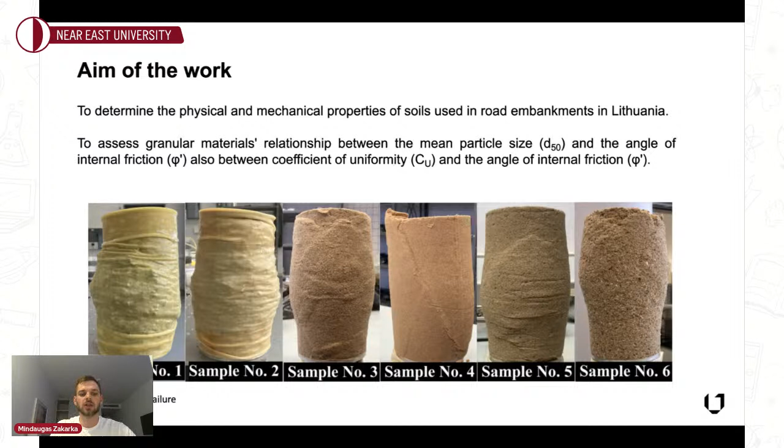You can see in the photos how a specimen looks after the triaxial tests. So why is it important?

I found that a lot of different researchers worked to determine the relationship of particle size with angle of internal friction. For example, direct shear test, triaxial test, 2D and 3D discrete element method analysis. And conclusions were obtained: at low sandy soil densities, the angle of internal friction decreases with increasing effective diameter of the particles.

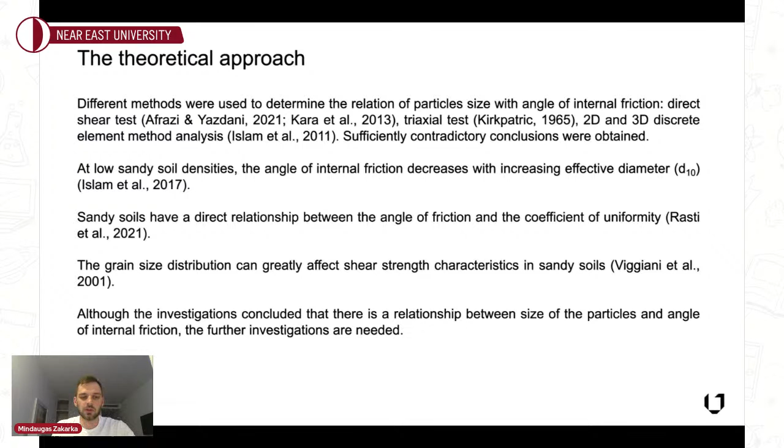Sandy soils have a direct relationship between the angle of friction and the coefficient of uniformity. The grain size distribution can greatly affect shear strength characteristics in sandy soils. And the main conclusion is that further investigations are needed.

So I had 6 different soils, 3 of them gravels and 3 of them sands, with different gradations. 2 of them are poorly graded gravels, 1 is medium graded, 2 poorly graded sand, and 1 medium graded sand.

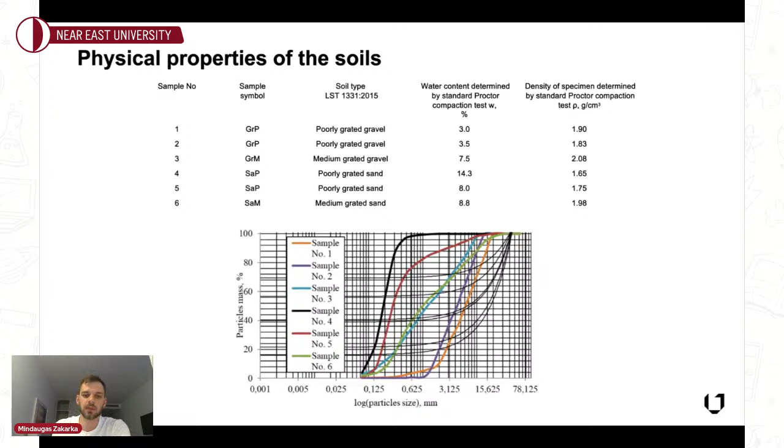I conducted proctor tests, standard proctor tests, to determine optimal water content to reach optimal density of the specimens, and I used them in the triaxial tests.

My specimens are diameter of 100 millimeters and height 200. The condition is unsaturated, meaning only optimal water content is added for preparation of the specimens and for compaction, and no more water is added.

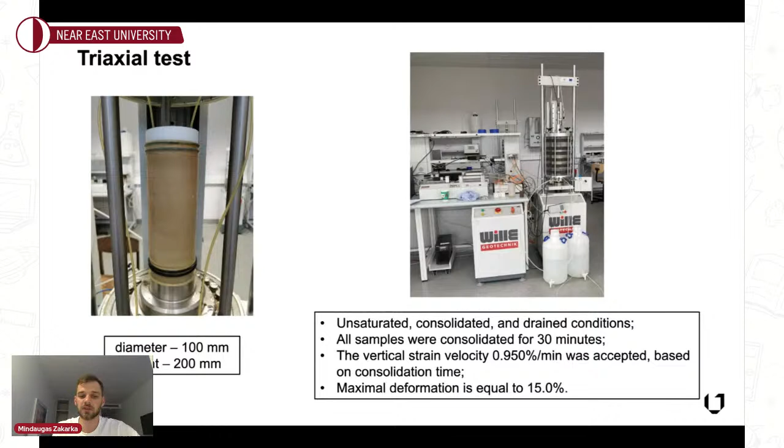All the samples were consolidated for 30 minutes, and based on that, a vertical strain velocity was accepted, which is equal to 0.95% per minute, and the maximal deformation equal to 15% was reached.

It is important to select the right cell pressures for the triaxial test. After analysis of 4 normative documents used in Lithuania and calculations, I found out that under the embankment, which is affected by traffic load, it is normal to expect cell pressures of 20, 50, and 70 kilopascals. So 6 different soils and 3 different cell pressures.

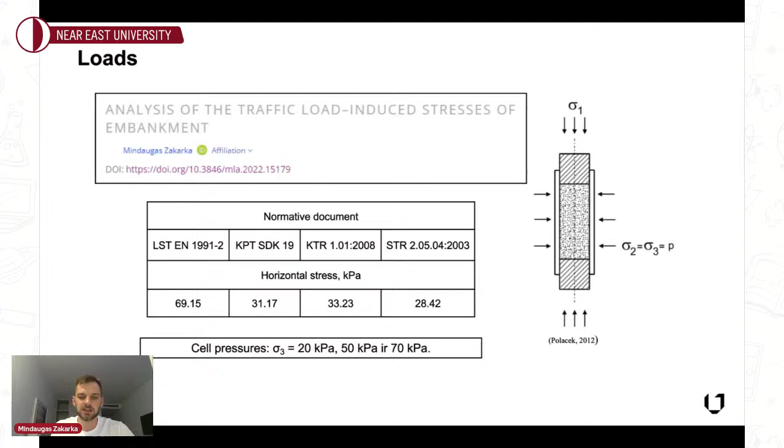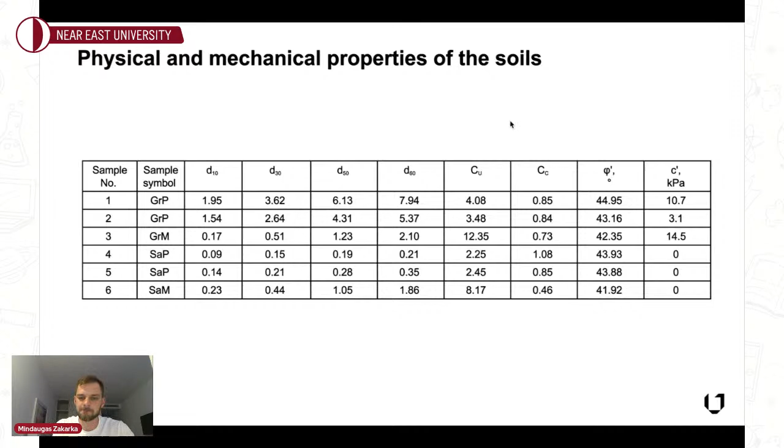After the triaxial test and other tests, I found out uniformity coefficients and the angle of internal friction, which is most important for me. And I found out a few relationships. The first is the relationship between average size of particles in gravel soil and the angle of internal friction.

When the average particle size increases, the angle of internal friction increases too. But I didn't find the relationship between coefficient of uniformity and angle of internal friction for gravel soils, and the opposite for sandy soils: when the coefficient of uniformity increases, the angle of internal friction decreases, and there was no relationship between the average particle size of sand and the angle of internal friction.

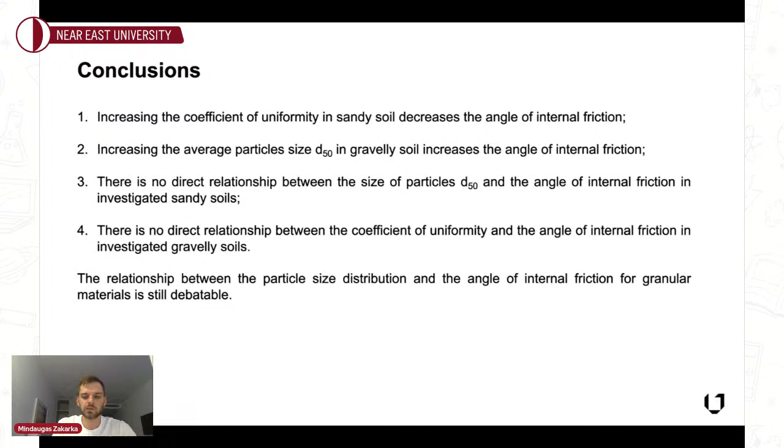So increasing the coefficient of uniformity in sandy soils decreases the angle of internal friction, but it doesn't work for gravel soils. For gravel soils, increasing the average particle size increases the angle of internal friction. The main conclusion is that there is a relationship between particle size distribution and the angle of internal friction, but the results are still debatable.

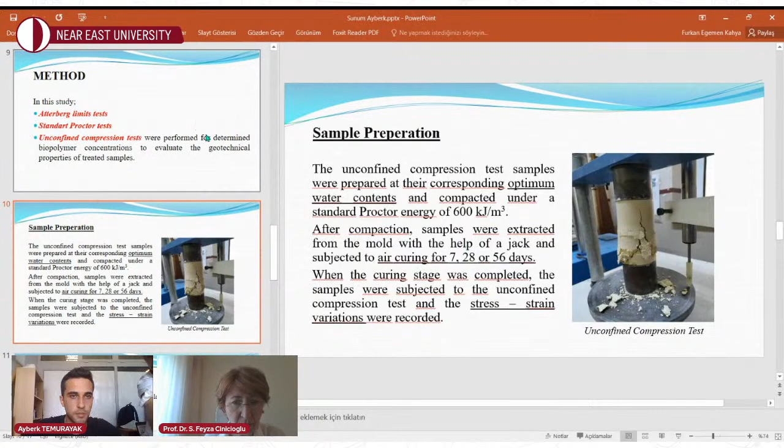If possible, could you go through from the beginning? Okay, in a fast way, quickly please. From the beginning. Yes, yes, please.

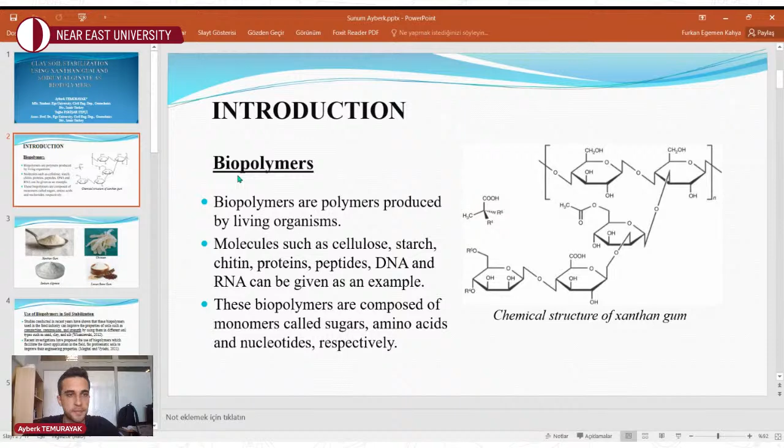Apart from these biopolymers, which are widely found in nature, there are also products that are used in the food industry, especially in terms of thickeners. Some of these biopolymers are xanthan gum, guar gum, sodium alginate, locust bean gum, and chitosan, etc.

Studies conducted in recent years have shown that these biopolymers used in the food industry can improve the properties of soils such as compaction, compression, and strength by using them in different soil types such as sand, clay, and silt. Recent investigations have proposed the use of biopolymers which facilitate direct application in the field for problematic soils to improve their engineering properties.

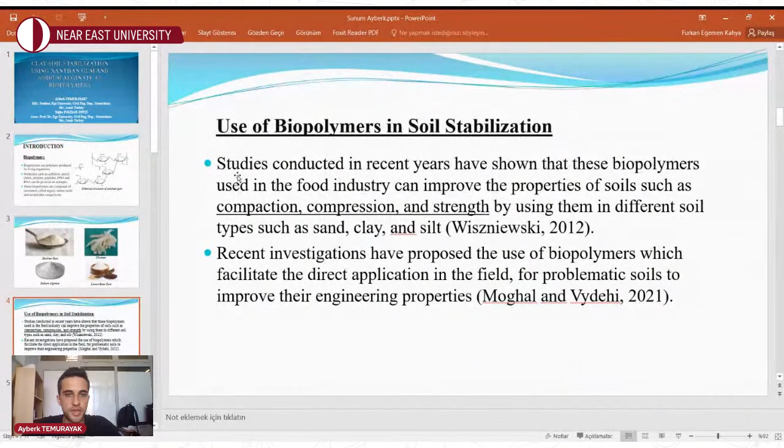In this study, two types of biopolymers, xanthan gum and sodium alginate, were used. Xanthan gum is a polysaccharide obtained from the fermentation of glucose or sucrose with Xanthomonas campestris bacteria. It is used as a stabilizer and thickener additive in the food industry. It has high thickening properties even in low amounts, like 0.5% and 1%.

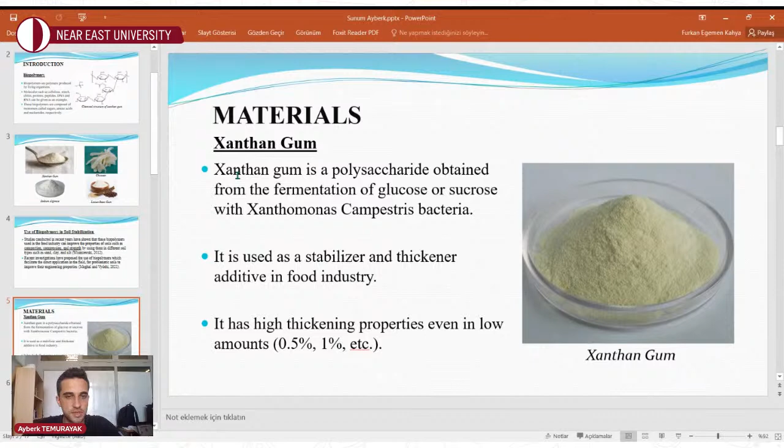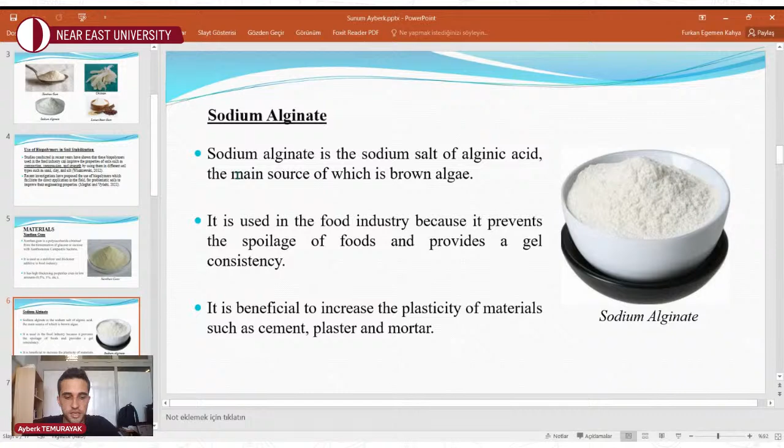Sodium alginate is the sodium salt of alginic acid, the main source of which is brown algae. It is used in the food industry because it prevents the spoilage of foods and provides a gel consistency. It is beneficial to increase the plasticity of materials such as cement, plaster, and mortar. Due to these features, the variety of studies on soil stabilization using different biopolymers has increased recently.

Since the beneficial effect of biopolymers is evident in fine-grained soils in the literature, kaolin clay was used in this study. The wet mixing method was used in the preparation of samples in all tests. According to this method, biopolymers were prepared as a solution in water and mixed with soil by weight of water.

Biopolymers used in soil stabilization were generally mixed with soil at rates ranging from 0.25% to 4%, as they have a high consistency increase feature even at low concentrations. The ratios that give the best results may vary depending on the parameters investigated.

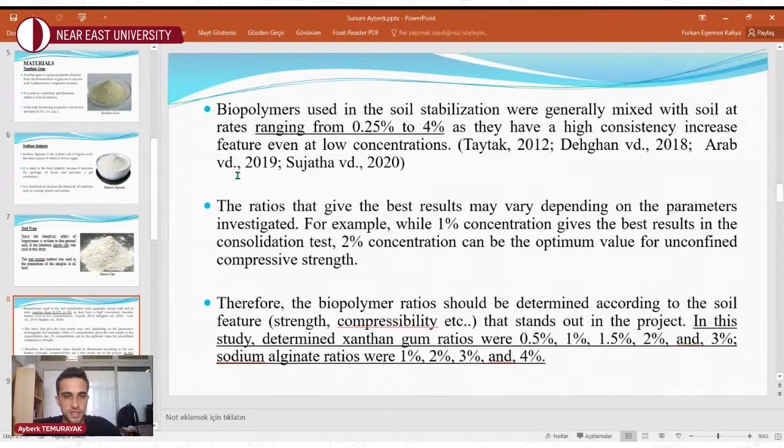For example, while 1% concentration gives the best results in the consolidation test, 2% concentration can be the optimum value for unconfined compressive strength. Therefore, the biopolymer ratios should be determined according to the soil feature that stands out in the project. In this study, determined xanthan gum ratios were from 0.5% to 3%, and sodium alginate ratios were from 1% to 4%.

In this study, Atterberg limits tests, standard Proctor tests, and unconfined compression tests were performed for determined biopolymer concentrations to evaluate the geotechnical properties of treated samples.

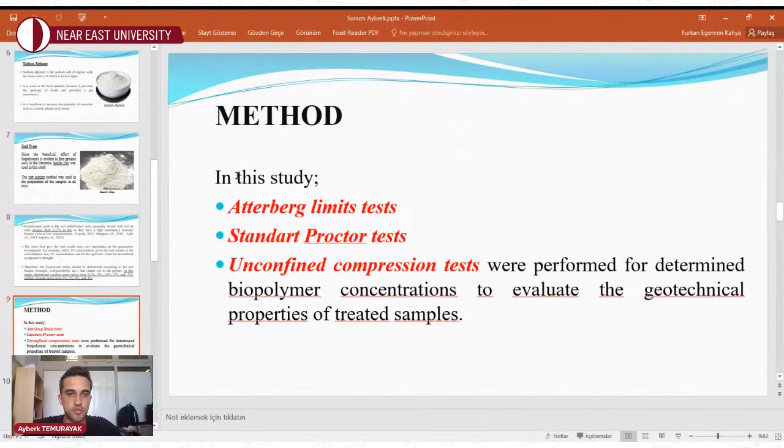Compaction tests were carried out to determine the optimum water content and maximum dry unit weight of clay and biopolymer treated clay. The unconfined compression test samples were prepared at their corresponding optimum water contents and compacted under a standard Proctor energy, which is 600 kJ per cubic meter.

After compaction, samples were extracted from the mold with the help of a jack and subjected to air curing for 7, 28, and 56 days. When the curing stage was completed, the samples were subjected to the unconfined compression test and the stress-strain variations were recorded.

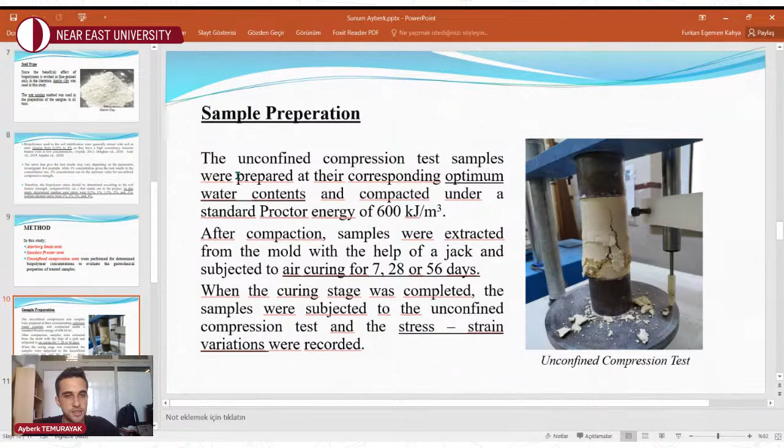The liquid and plastic limits of the kaolin clay were determined according to ASTM standard. The liquid limit of the clay was 51.3 and plastic limit was 36.5, and the plasticity index was 14.8. The optimum water content of the clay was 31% and the maximum dry unit weight was 1.64 tons per cubic meter.

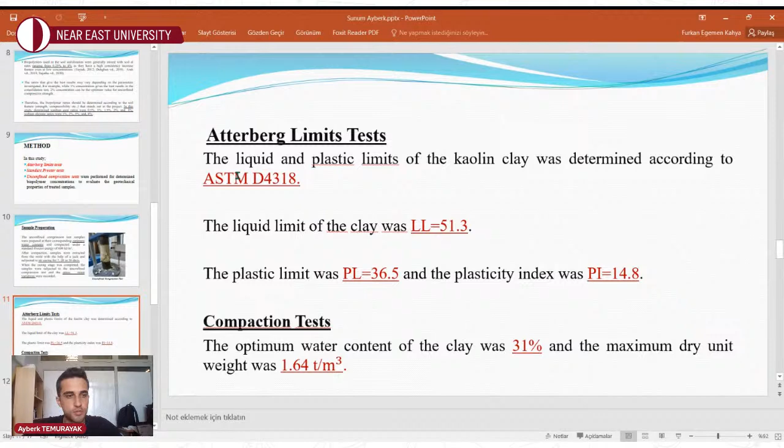Considering the results of the liquid limit tests, a significant increase was observed in treated samples. While the liquid limit increased by 34% with the addition of xanthan gum, from 51.3 to 68.7, there was an increase of over 100% from 51.3 to 133 with the addition of sodium alginate. At the highest concentration of sodium alginate, the rapid change in viscosity leads to a nonlinear increase in the liquid limit.

Plastic limit increased with the addition of biopolymers, but compared to the liquid limit, the increase of the plastic limit was very low, only 1%. Since the liquid limit increased more than the plastic limit, the plasticity index was also increased. Adding water to the biopolymer-treated soils activated the monomers of the biopolymer and formed ionic and covalent bonds with soil particles. Thus, monomers required more water, which increased the liquid limit and plasticity index of the soil.

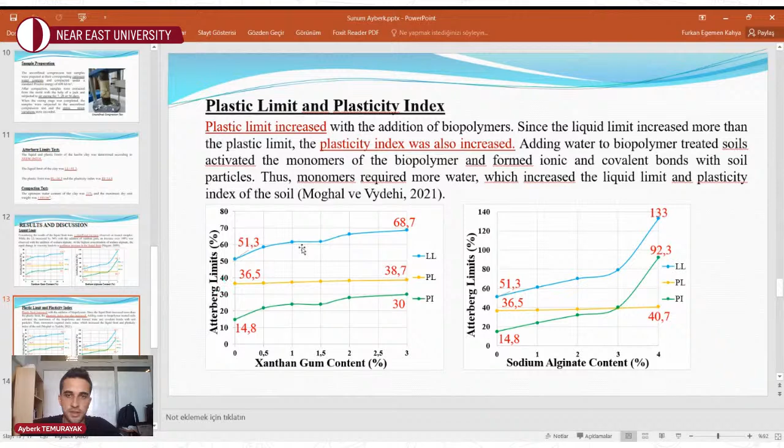In this figure, the blue curve represents the xanthan treated sample, and the green curve is the sodium alginate treated sample.

As a result of the compaction test, the optimum water content of kaolin clay was 31% and the maximum dry unit weight was 1.64 tons per cubic meter. With the addition of 2% xanthan gum and 3% sodium alginate, the optimum water content increased by 3% and reached 34% with both biopolymers.

The maximum dry unit weight decreased slightly, reaching 1.6 tons per cubic meter in the xanthan treated sample, and also decreased slightly to 1.56 tons per cubic meter in the sodium alginate treated sample. The decrease in maximum dry unit weight and the increase in optimum water content was due to the fact that the monomers located in the pores between soil particles absorb more water and cause a net decrease in particle interaction.

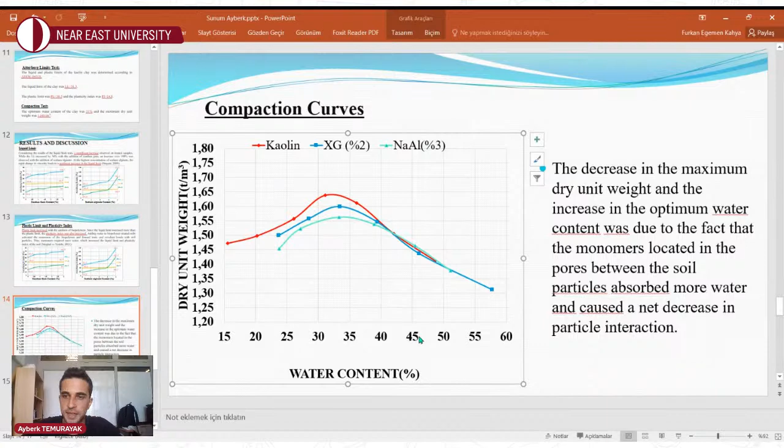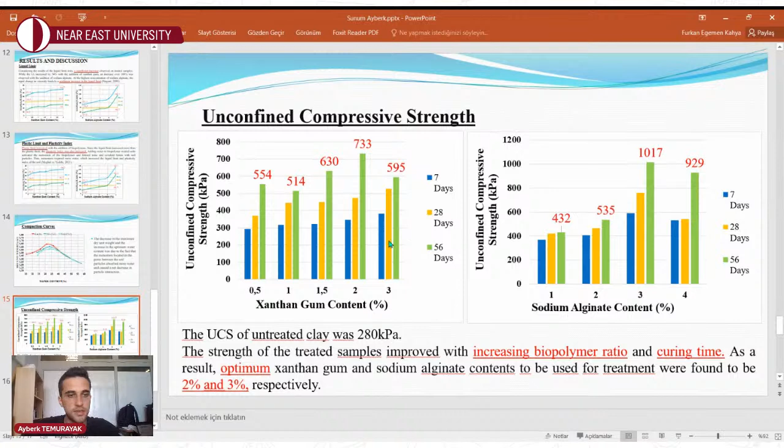The unconfined compressive strength of untreated clay was 280 kPa. The strength of the treated samples improved with increasing biopolymer ratio and curing time. The increase of unconfined compressive strength was 2.6 times in 56-day cured samples treated with 2% xanthan gum, which is 733 kPa, and 3.6 times in 56-day cured samples treated with 3% sodium alginate, which is 1017 kPa. As a result, the optimum xanthan gum and sodium alginate contents for treatment were found to be 2% and 3% respectively.

In this study, two types of biopolymers were used as an alternative soil stabilizer. Atterberg limits, compaction, and unconfined compression tests were performed with the determined concentrations of xanthan gum and sodium alginate. The liquid limit increased in all treated samples, and was higher in sodium alginate treated samples compared to xanthan gum treated samples. Plastic limits increased in both xanthan gum and sodium alginate treated samples, and plasticity index also increased in both treated sample groups.

The optimum water content increased by 3%, and the maximum dry unit weight of the treated samples decreased, with the lowest MDD achieved in sodium alginate treated samples. The UCS of the treated samples improved at optimum biopolymer ratios and with curing time. As a conclusion, soil stabilization with biopolymer additives is a promising approach in geotechnical applications.

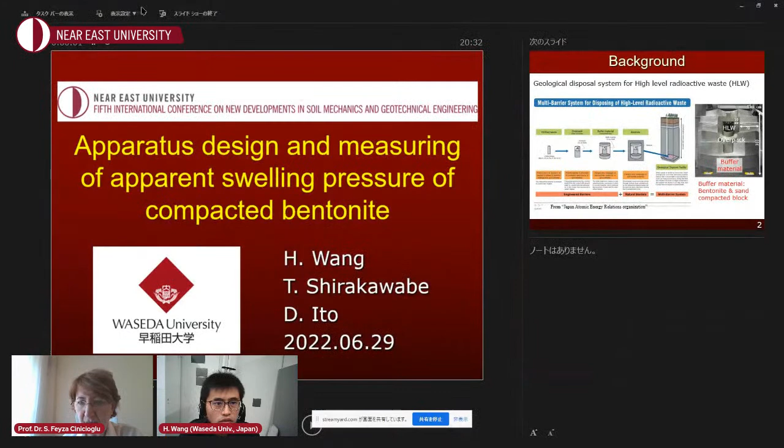Is it possible to see the screen? Hello, yes it is, can you see the screen? Is that okay? Yes, it seems okay. Okay, great, thank you. Let me start my presentation.

I'm Hailong Wang from Waseda University here in Japan. Right now it's evening. I would like to talk about the apparatus design in order to measure the so-called apparent swelling pressure of compacted bentonite.

I think this study is not so familiar to the audience, so I would like to introduce the background.

One of our studies focuses on geological disposal in order to deal with the high-level radioactive waste from the energy system. The idea of this system is to put the radioactive waste deep in the ground, several hundred meters down, and the waste itself is protected or isolated by several barriers, like the steel container, outside of that the so-called buffer material, and outside this buffer material is bedrock.

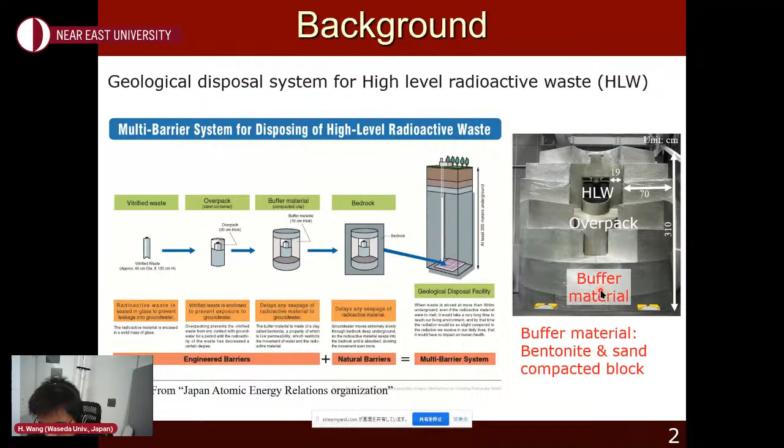Bentonite was used as the main material for this buffer material, shown here. It's in a compacted condition like this, and after absorbing water from underground, the volume of the bentonite will swell like this.

In the disposal condition, the swelling deformation is confined by the bedrock. So instead of swelling deformation, some pressure is generated in the underground condition. I call this pressure the apparent swelling pressure. This is the pressure we are trying to measure in this study.

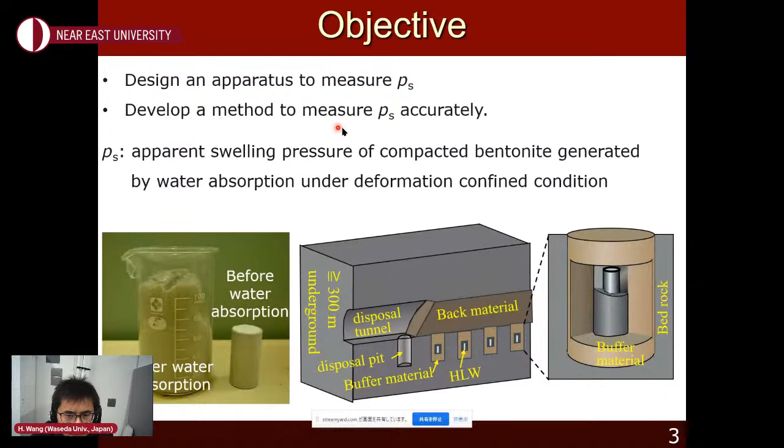The objective of this study is to design an apparatus to measure this apparent swelling pressure, PS, and to develop a method to measure it accurately.

To measure swelling pressure, in the past there have been many studies, basically using the consolidation apparatus. There are several ways. One way is first to saturate the specimen without any confining condition to allow free swelling. Then after saturation, we apply load in the consolidation apparatus, step by step, until the volume returns to the original volume. We define this pressure as the apparent swelling pressure. This is the first way.

Another way is to prepare different specimens, and for each specimen apply a different initial load - for example, zero, or some load. Under the initial load we saturate the specimen, and since under higher load the deformation will be smaller, we can find the point corresponding to zero deformation. We define this point as the swelling pressure. This is the second way.

A third way is to try to keep the volume as constant as possible. When we find some deformation, we immediately apply load to return the deformation. During saturation, if swelling happens again, we apply another load. Gradually, as the load increases, there will be a point where no more load is needed after saturation. At this point, we define another pressure as the swelling pressure. This is the third way.

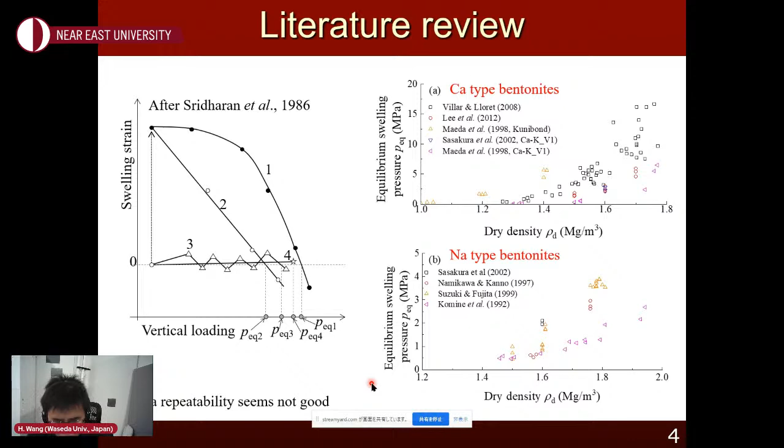For example, this is the so-called final equilibrium swelling pressure plotted against dry density. You can see that even under the same dry density, the data is scattering very much. This is for so-called calcium-type bentonite, and for sodium bentonite also, even with the same experimenter, the data is very scattered. So we considered how to get a good testing method in order to measure this pressure accurately.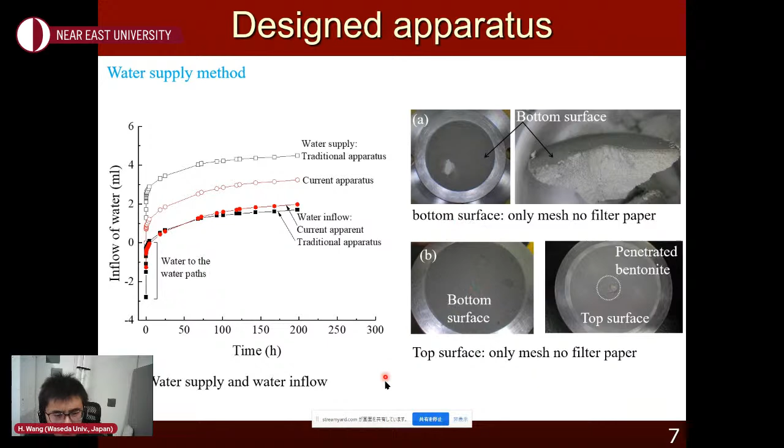Of course, we conduct some other tests to confirm this method. Basically, it's quite reliable to transport the water. However, because we used filter paper which is also compressible, it has some deformation. If possible, we try to remove the filter paper, but if we remove it, it's not easy to transport the water into the specimen. So basically, we use the mesh plus filter paper system to conduct the test.

There are some problems when we conduct the test. For example, because of the filter paper compression problem, sometimes we found that due to swelling, some material, some bentonite, squeezed out, like here. For this problem, we try to refine the apparatus to increase the manufacturing accuracy to remove this kind of problem.

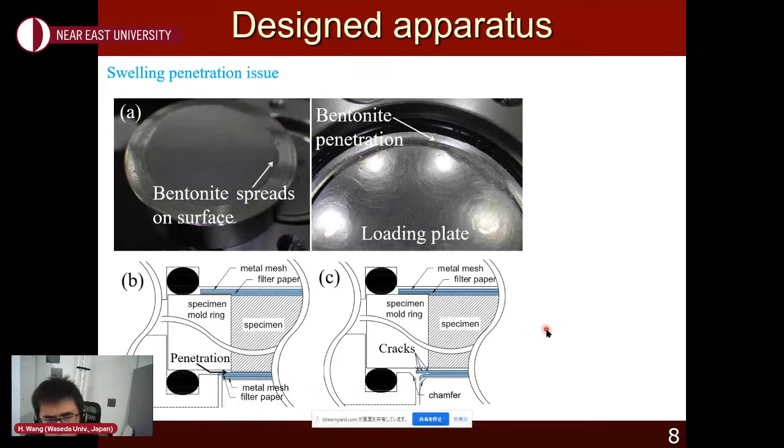Another thing is the filter paper softening. It's different from the filter paper compression. When we apply a filter paper under the specimen, the stiffness of the filter paper will reduce because of the water. Once the filter paper absorbs the water, it becomes soft. So if we apply an initial load here, because of the deformation and softening of the filter paper, there will be a reduction of the stress. So this is another problem.

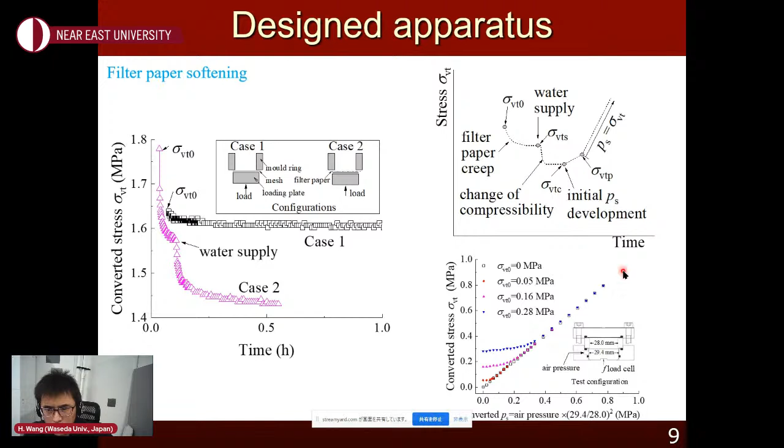In order to distinguish between the load applied initially and the swelling pressure we measured, we try to understand this by applying some calibration tests. In the test, we apply some air pressure to simulate the swelling pressure and apply the load. As a result, we can find that if we apply a relatively small initial load, basically when the pressure measured exceeds the initial pressure, the result will be the swelling pressure for the tested specimen.

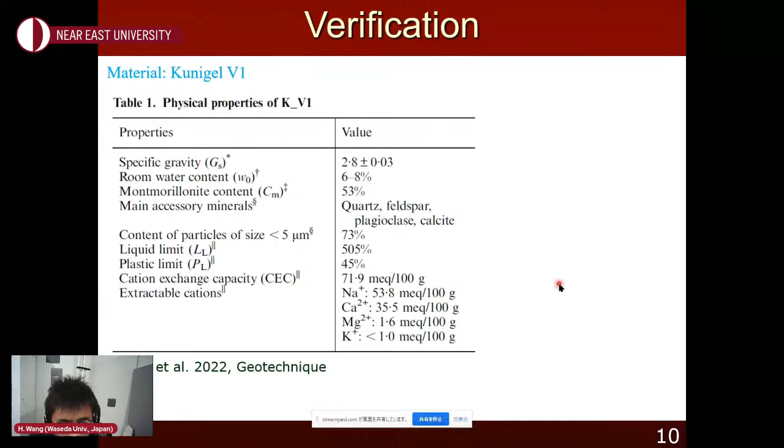So to verify the apparatus, we used a bentonite, so-called Kunigel V1. Here is the basic physical conditions of this soil. We prepared some identical tests. The first one, quite two very similar specimens. We apply the same initial load, and during the water absorption, we measure the change of the load, or the change of the swelling pressure.

This is a very typical swelling pressure curve. It increases first, then goes down, then goes up until the equilibrium swelling pressure. This is very typical. However, when we try to change the initially applied load, it can be seen the measured swelling pressure also changes somehow. The larger the initial pressure we applied, the larger the final swelling pressure we measured would be.

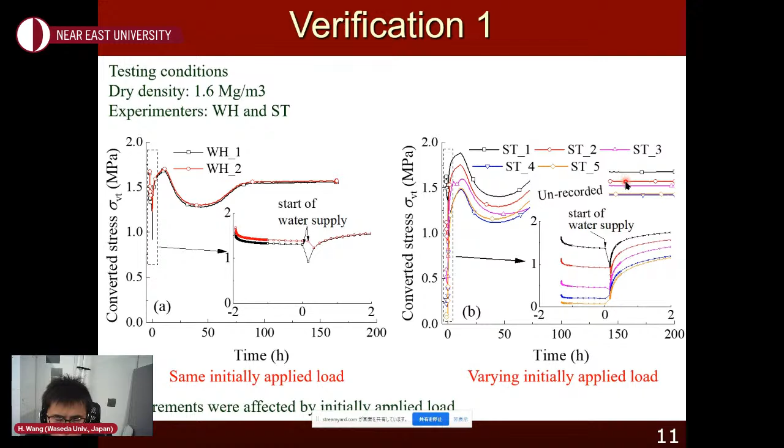So here's a problem. It's induced mainly because of somehow the initial pressure applied to the specimen. It's a little bit complicated to explain here, but we found a way to solve it. When we prepare a specimen, after compaction, we try to trim the surface of the specimen because of the deformation of the filter paper, there's some specimen outside of the range. So we trim this way and turn the specimen so that before the test, there's a small space under the load cell.

By this way, we again prepared several identical specimens and applied different vertical loading. As you can see, although there's still some very tiny difference, basically compared to the previous study, the results are quite similar. This is conducted by the same experimenter.

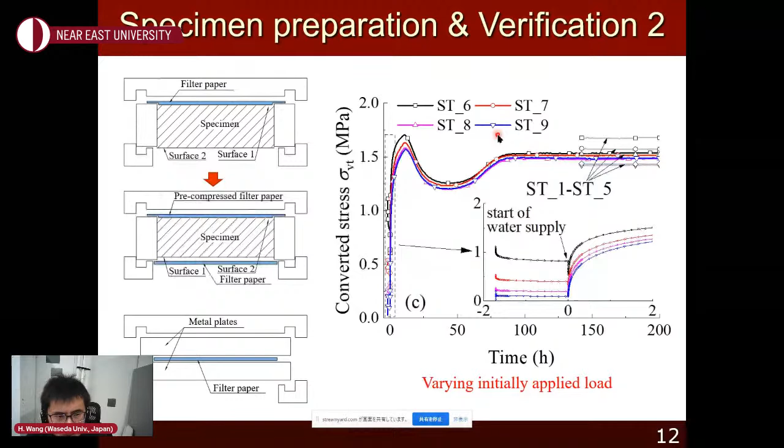In order to see any difference based on the experimenters, we conduct 3 tests by one experimenter and another 3 tests by another one. As you can see, for the same dry density, the measured curve is very similar, although there's some difference, but basically they're quite similar. And for different dry density, you can see the measurement is also quite well. As increase of the dry density, the pressure increases.

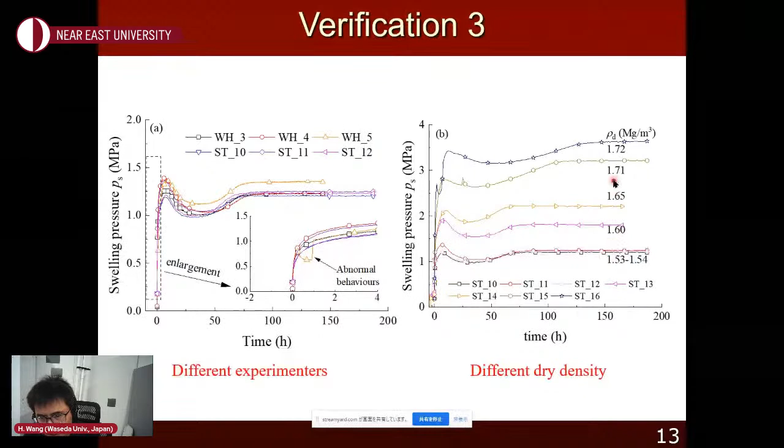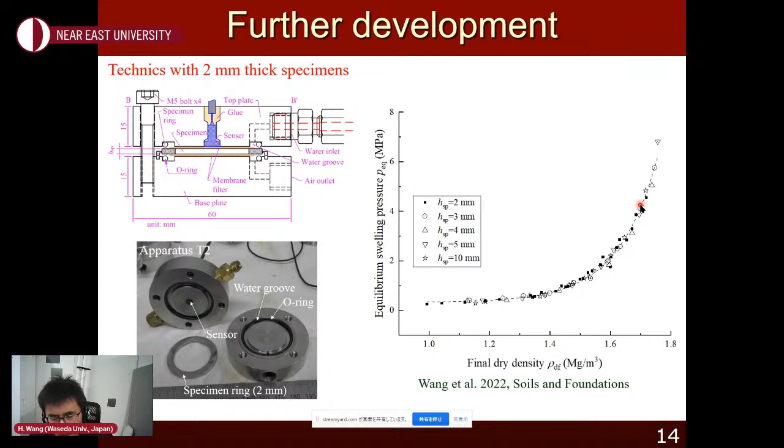As a conclusion, we proposed an apparatus and test procedure to measure the apparent swelling pressure, and the reliability, I think, is very high with the proposed procedure. The design drawing and the specimen preparation method are open right now, so if you're interested, you can check. Thank you very much, this is all from me.

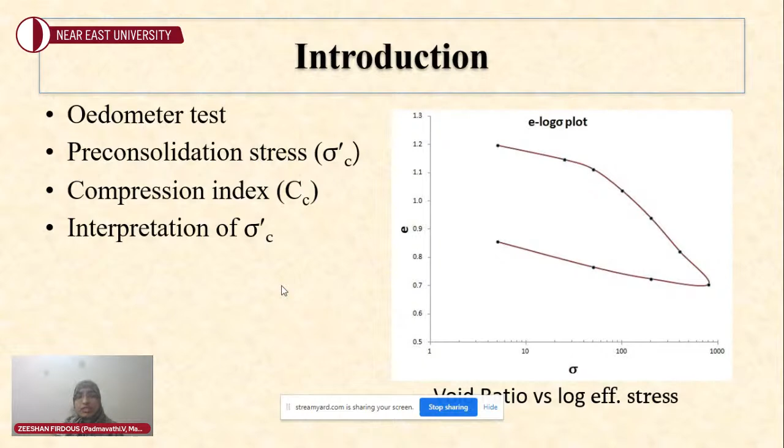Introduction: Oedometer test is usually used to represent the one-dimensional soil deformation behavior plotted on a semi-logarithmic graph with void ratio versus effective stress. The pre-consolidation stress is an important parameter which plays a vital role in estimation of settlements, and compression index also plays a greater role in estimation of settlements. Hence this study involves interpretation of pre-consolidation stress from different methods, and the analysis goes on.

The methods used for interpretation of pre-consolidation stress are Casagrande method, Silva, Schmertmann, Nagaraj et al. These are semi-logarithmic methods. Butterfield, Oikawa, Sridharan - these are bilogarithmic methods. Janbu's method utilizes the concept of constraint modulus, in which soil deformation behavior is studied in only one direction.

The most commonly used method is Casagrande method. This method utilizes the concept of maximum point of curvature. At this point, the tangential line and a horizontal are drawn, and the backward extension of the virgin compression line intersects the line of bisection at point T. The stress corresponding to point T is the pre-consolidation stress.

Similarly, in Silva's method, the backward extension of the virgin compression curve intersects the initial void ratio line at point C, and the drop of a vertical from point C intersects the curve at point E. The extension of point E to point F intersects the virgin compression line. The stress corresponding to point F is the pre-consolidation stress from Silva's method.

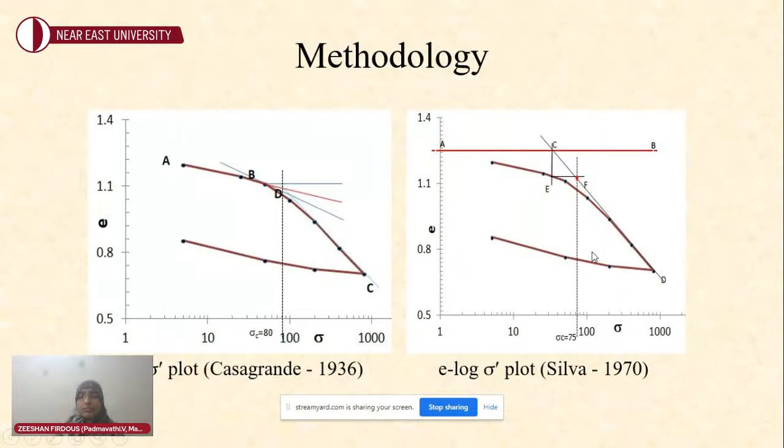In the Nagaraj method, the pre-consolidation stress is estimated from the intersection of the normal drawn from the point of maximum curvature, which intersects the initial void ratio line at point D. The stress corresponding to this point D is the pre-consolidation stress.

The Schmertmann method is generally utilized in obtaining field compression curve. The backward extension of virgin compression curve from point 0.42 e naught to the initial void ratio line intersects at point G. A line EF is drawn parallel to the recompression curve, and the stress corresponding to point F gives the pre-consolidation stress.

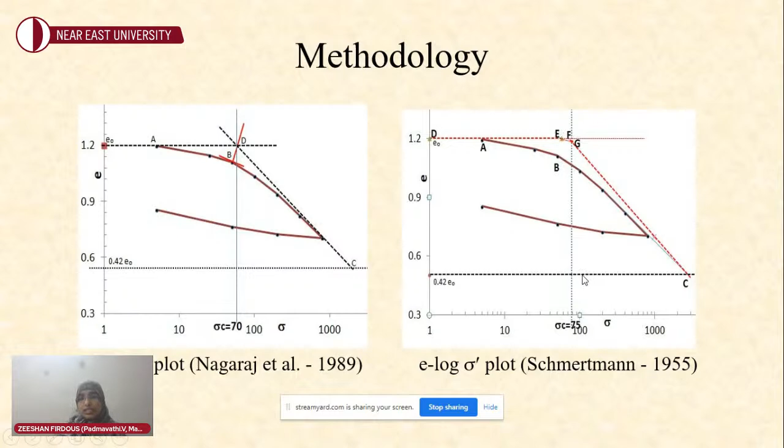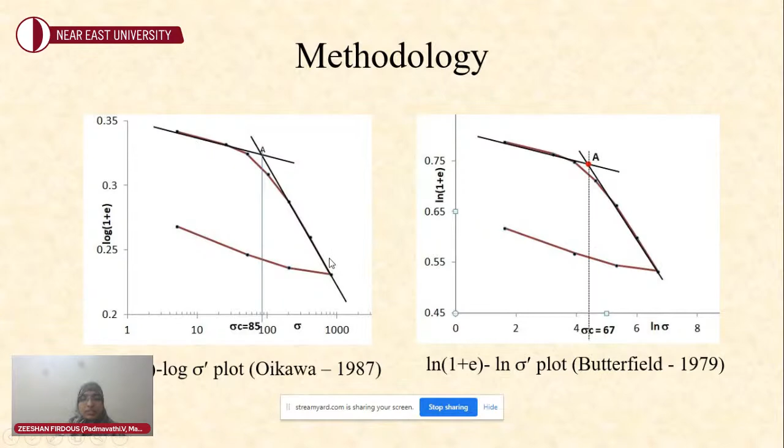Oikawa and Butterfield methods are both bilogarithmic methods. The linear portions of the curves are intersected at points A, and the stress corresponding to these points gives the pre-consolidation stress.

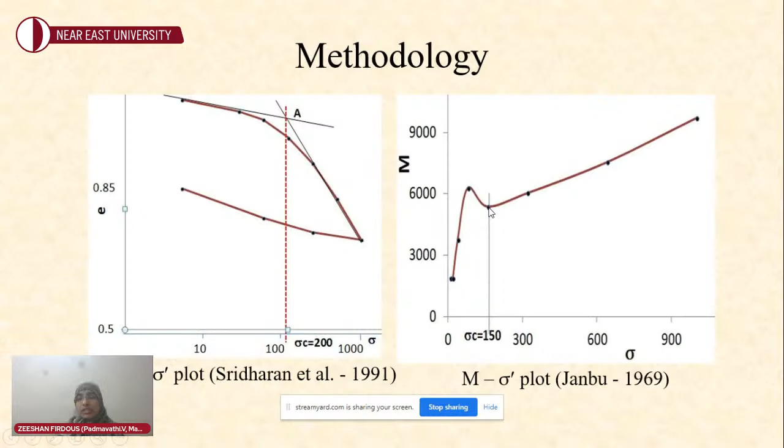Sridharan method is also a bilogarithmic method in which void ratio and effective stresses are plotted on logarithmic scales. The intersection of the linear portions of the curves gives sigma c. Janbu's method utilizes the constraint modulus; when a significant drop in constraint modulus is observed, the stress corresponding to the point of drop gives the pre-consolidation stress.

The compression index is calculated from equations 1, 2, and 3. Equation 1 is a general equation which is the slope of the E log sigma plot, giving Cc. The compression index from the Butterfield and Oikawa method is

derived as Cc equals Cc dash minus 0.0192, divided by 0.19, where Cc dash is the slope of the virgin compression curves from these methods. For the Sridharan method, the equation is derived as Cc equals Cc double dash minus 0.1067, divided by 0.23, where Cc double dash is the slope of the log E versus log sigma plot.

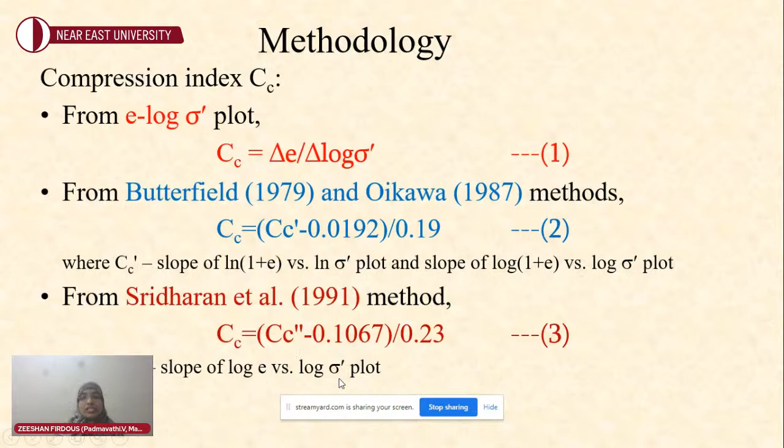In this study, the data is collected from sources already available in the literature. The site locations are from Egypt, California, and Kerala.

From this entire study, we can infer that the Casagrande method alone is not desirable to give the sigma c values in estimation of settlements. The results obtained from various methods can be analyzed, and the most repetitive results can be chosen to get appropriate settlement estimations.

The conclusions of this study are that the variations are higher at higher sigma c and higher overconsolidation ratios, as the sample has to undergo a large range of unloading and loading cycles, and due to this there might be a variation in the estimated values.

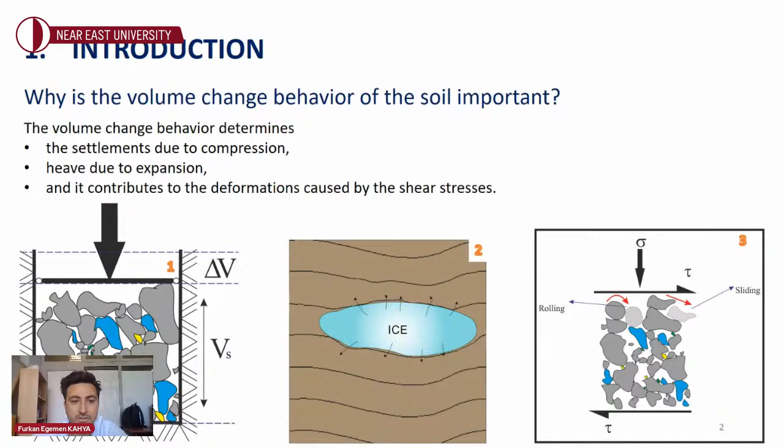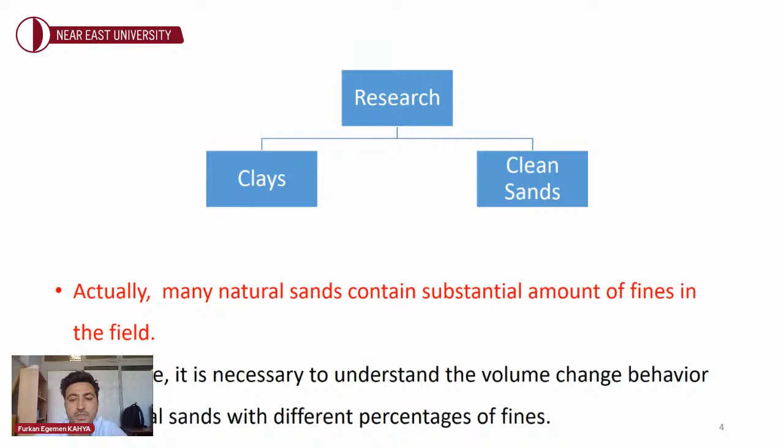When we look over the literature, clays and clean sands have been studied extensively in terms of volume change behavior. Thereby, it becomes important to understand the volume change behavior of natural sands with different percentages of fines.

In this study, two different natural sands named Nazarköy and Yamanlar sands, and fine natural mica, were used to evaluate the volume change behavior and its effect on the shear strength of the soil.

The Nazarköy sample was taken from the Kemalpaşa district. On the other hand, Yamanlar sand was taken from near the Çiğli district. Also, natural mica particles were provided from a private company.

According to ASTM standards, Nazarköy and Yamanlar samples are both classified as poorly graded sands. Also, maximum void ratio, minimum void ratio, and specific gravities are given in the table.

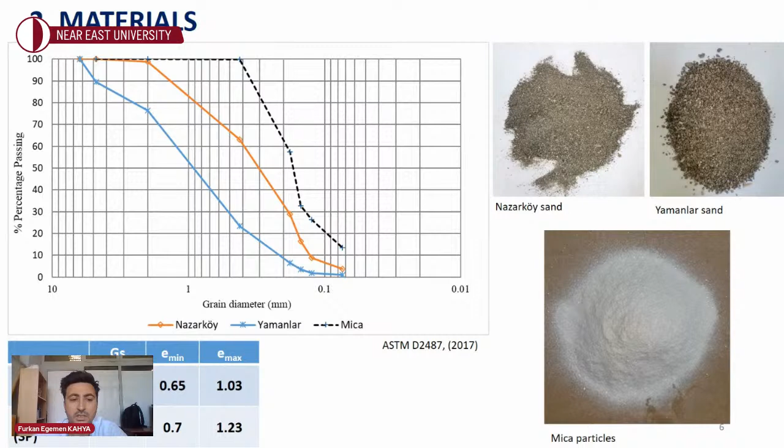Within the context of this study, oedometer tests and triaxial tests were conducted. The grain sizes of both sands were limited between number 10 to number 40 sieves.

For the oedometer test, natural state and 7 different sand-mica mixtures were prepared under fully saturated state, and the sands were placed in the mold layer by layer with a smooth tamping technique. Incremental loading was applied in 9 stages, from 12.5 kilopascal to 3.2 megapascal, and each loading stage was applied 1 hour after the end of the primary settlement, according to ASTM standards.

Triaxial tests were conducted on natural, 10%, 30%, and 50% mica added sands in 4 stages. Samples were placed in 5 layers, and each layer was tamped down using a rod to maintain a relative density of 55% to 65%, and 3 different effective stresses were chosen, from 50 kilopascal to 200 kilopascal.

When a load was applied on the granular soil, the particles transmit the loads to each other through the contact points of grains. This transmission creates a fictive force chain in the granular medium.

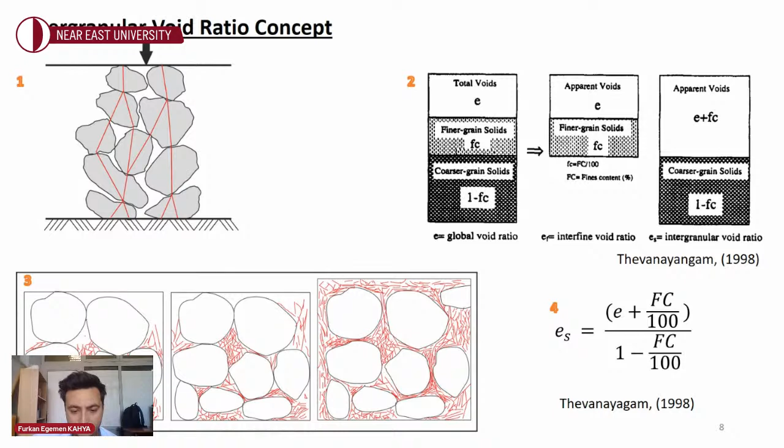In this study, Thevanayagam's intergranular void ratio equation was preferred. Threshold fine content can be found on the intergranular void ratio to effective stress plane, as the fine content where the compression curve converges to the maximum void ratio line. Threshold fines content of Nazarköy and Yamanlar sands correspond to 12.5% and 17.5% mica percentages.

Also, as a different perspective, if the fine content that shifts the soil behavior from the granular part to the fine part is considered as a function of effective stress, it defines a transition fine content zone. Nazarköy samples show a transition zone from 12.5% to 35% mica content, while Yamanlar samples show a transition zone from 17.5% to 39% mica content.

The volume changes in sand exerted by fines content are not only important in terms of compressibility, they are also important in terms of shear strength, because any volume change in the soil makes a contribution to the shear stress. Therefore, it is important to understand the fines content effects on the shear strength.

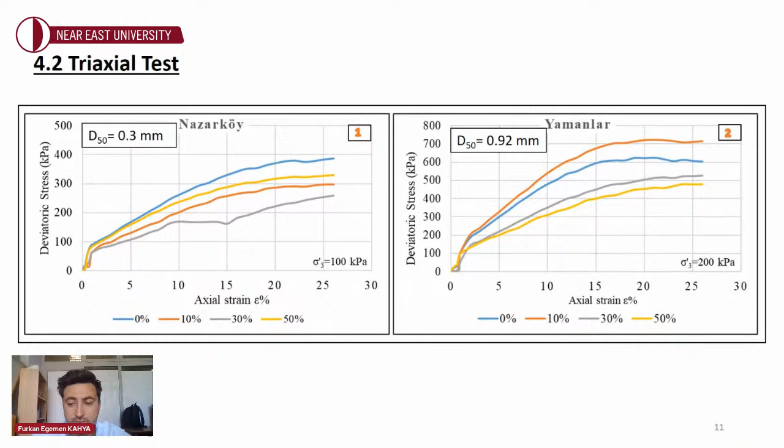On the other side, the shear strength of Yamanlar sand increases at 10% mica content, in contrast to Nazarköy sand. However, the shear strength of Yamanlar samples decreases with increasing mica content. The maximum shear strength of these two sands was found at different mica contents, due to the median grain size differences between the two sands.

This study aimed to investigate the effects of mica content in terms of volume change behavior and how it affects the shear strength response. In this sense, the results of this experimental study can be summarized as: volume change and shear strength behavior of natural sand are directly affected by fines content.

The mica affects the interparticle frictional mechanism of the granular medium. There is a certain fines content, so-called threshold or transition fine content, that shifts the soil's behavior from the granular part of the soil to the fine part of the soil, specific to the sand type.

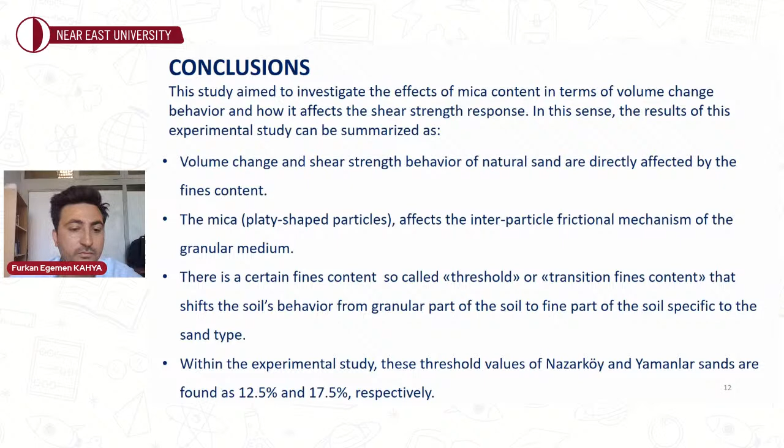Within the experimental study, these threshold values of Nazarköy and Yamanlar sands are found as 12.5% and 17.5% respectively. Median grain size is one of the most critical parameters to determine the fines content where peak shear strength is observed.

Median grain size of Nazarköy and Yamanlar sands are found as 0.30 millimeter and 0.92 millimeter. The peak shear strength of Nazarköy sand is observed in its natural state. However, the peak shear strength of Yamanlar sand is achieved at 10% mica content.

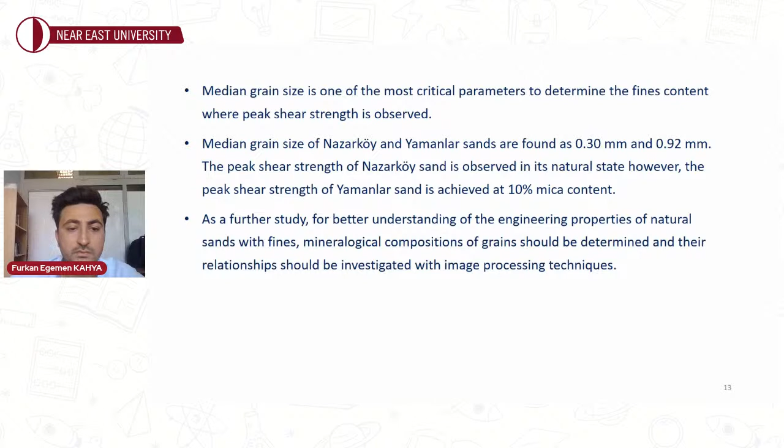As a further study, for better understanding of the engineering properties of natural sands with fines, mineralogical compositions of grains should be determined and their relationship should be investigated with image processing techniques. Thank you.